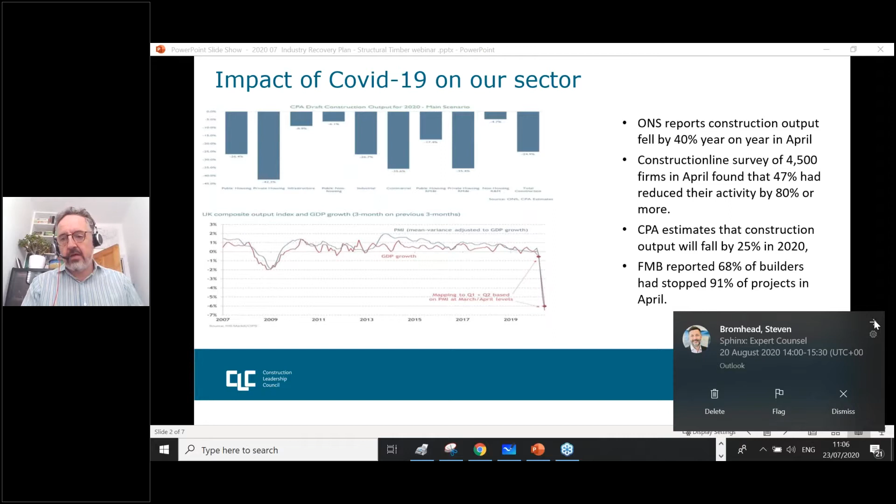And then this idea of accelerating the adjustment to a new normal, and a new normal has to be a more productive and more sustainable new normal. So then you can start to see the clues around direction towards net zero, direction towards wider utilization of offsite prefabrication, for example. 3 phases, I'll come back a little bit later on.

Say, for example, the CIH value framework, which is a 5 capitals tool, which will get people to think more about, say, for example, natural capital, more about human capital and innovation. So some really good complementary elements there.

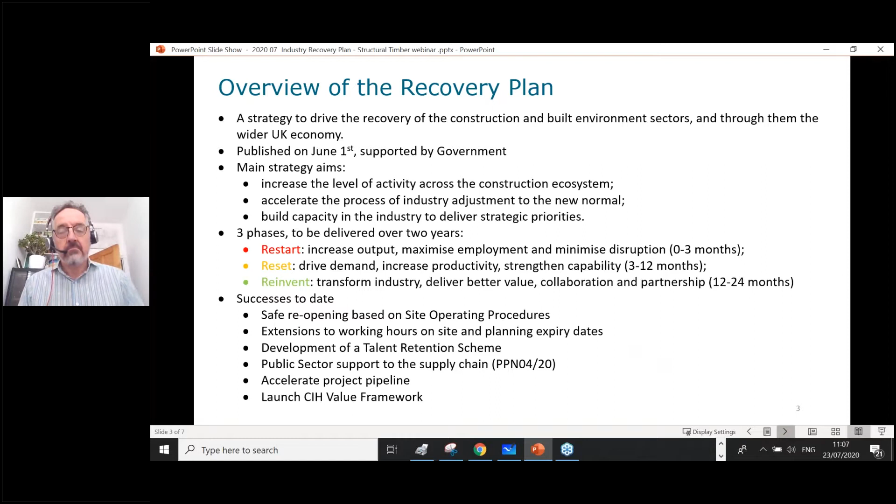And now getting into the real meat of this. This is a 3-stage plan, each with 3 key areas of priority. And if you go and download the full plan, you'll see that there's another page for each of these stages. So I don't intend to go through in much detail. There is a lot to it, and I'd recommend that everybody goes and digs it out. Easy to find on the Construction Leadership Council website.

You'll see that Restart is focused on trying to get as much of the existing work going on as possible. And if you think about something like the recent announcements around retrofit funding, fast money to get as many people working on site as possible. And once you've got that set up, that's a project, that scheme up and running. So very important that you get that money flowing through quickly.

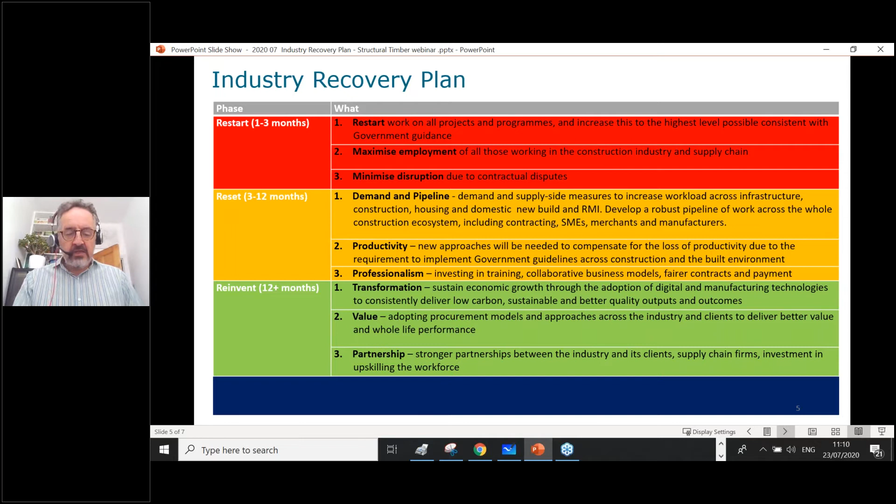Then the work around Procuring for Value, which was launched last week on the 2nd anniversary of the sector deal. So again, some great work there. And then this idea of partnerships. If you can imagine, really strong partnerships between manufacturers, standards organizations, clients, designers, to start coming up with these great solutions. Now, just then getting that into something concrete, what are we going to get out of this?

Reducing carbon emissions perfectly aligns with the timber agenda. And then some of these societal needs, I think, would also include introducing more manufacturing capacity in local areas, so resilient industry. And on the construction side, the elements I'll probably highlight here are the ones around the innovation culture aligned to productivity, and the skills and industry diversity bit. And that's people, and it's also players as well. And just wrapping up in terms of what does that mean for the timber sector, I've obviously not put a no in there, but I put some maybes.

And so you'll see there's a very strong alignment to net zero carbon, as you'd expect. And of course, that's something which will have to be detailed out over a period of time. More strongly, there's a really massive push towards component-based design. So again, if somebody wanted to have a look on the website around platform-based design principles and think about how timber components might fit into that, that's a huge opportunity.

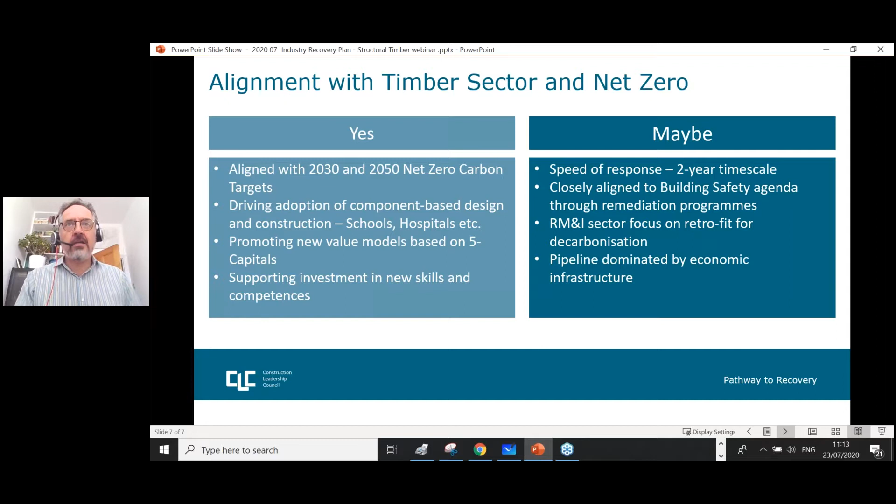Great, thanks very much, Simon, for your presentation. And before we move on, I've just got one quick question for you. So the CLC came up with the recovery plan a little while ago now. So how do you think the industry is actually doing right now in terms of recovery when it comes to meeting the recovery plan?

Well, I think as I had on that opening slide, there's been quite a lot of quite good positive uptake in terms of the kind of steps that were needed to help the industry. And a good example of that would be the announcement this week around provisions for local authorities to provide greater flexibility around operating hours. And it appears that quite a lot of organisations have been quite successful in getting their productivity not up to levels where they were in February, March, but as close as you possibly can. So I think people are in that kind of space.

At the same time, I think we do have to be realistic about just potentially how much harm was done around the shock in April and June in terms of just how much cash was lost. So I think that's something which we just need to watch out for in terms of the health of the supply chain and see how they're coming back. But considering how badly the sector was affected, we're not doing badly. But at the same time, I wouldn't want to be too optimistic about saying we're out of the woods yet.

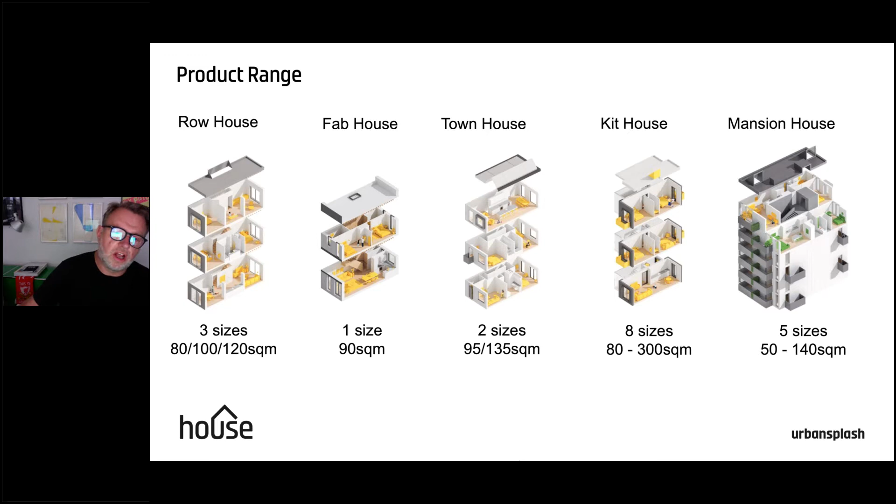Where we are at the moment is we've got an emerging product range, and that's just some of the stuff you can see on the screen there now. There's a few key things which all of the products share in common, and that is we want our homes to be bigger generally, because the UK's got the smallest homes in Europe, and actually they've been getting smaller over the last 20 years.

We want more flexible homes because the house building industry doesn't really give a lot of choice here, so we want to give customers the ability to configure their own homes and create homes they want to live in for themselves. And we want our homes to be naturally as sustainable as they possibly can be, and that's a journey we're on. We haven't got it right yet, I wouldn't say, but we're definitely ambitious in our plans for that, and certainly with Sekisui House, keen to push that as hard as we can.

And getting modern, well-designed homes, which I think is missing in the market, is really key to us. And the big thing there is factory standards, and that's about providing not just quality, but speed, lower waste, less energy, and less noise and disruption on site. I think all those things are key to this conversation.

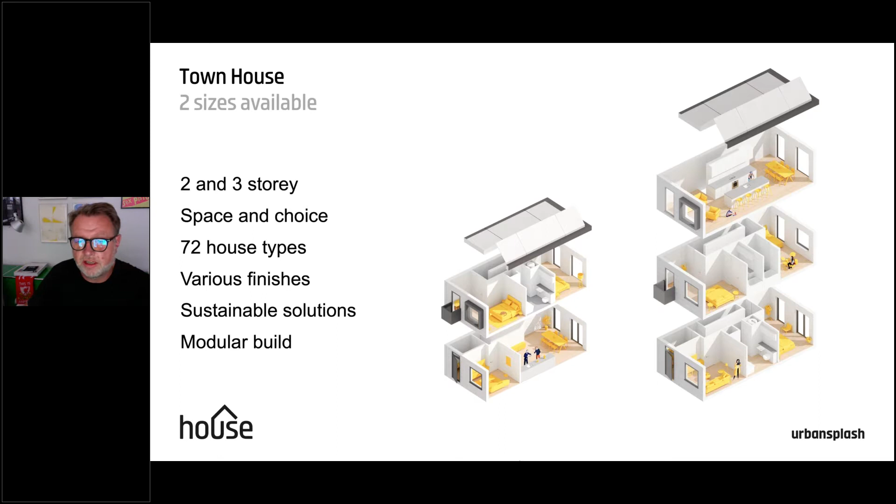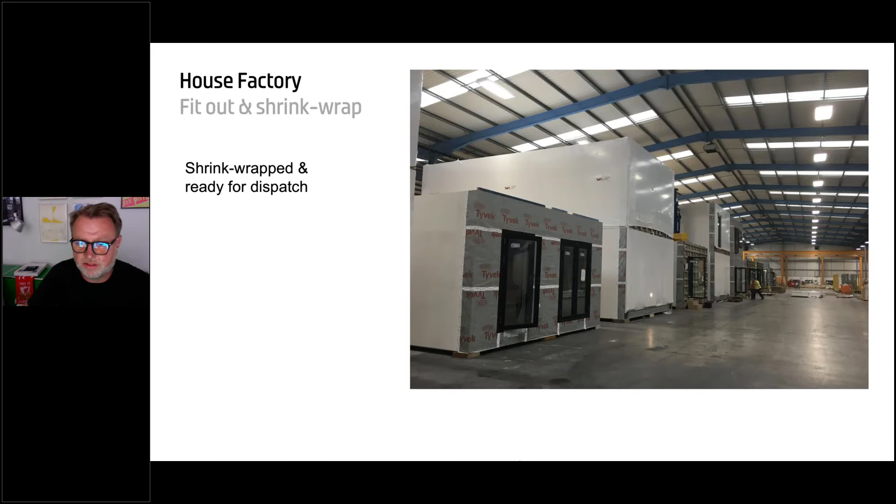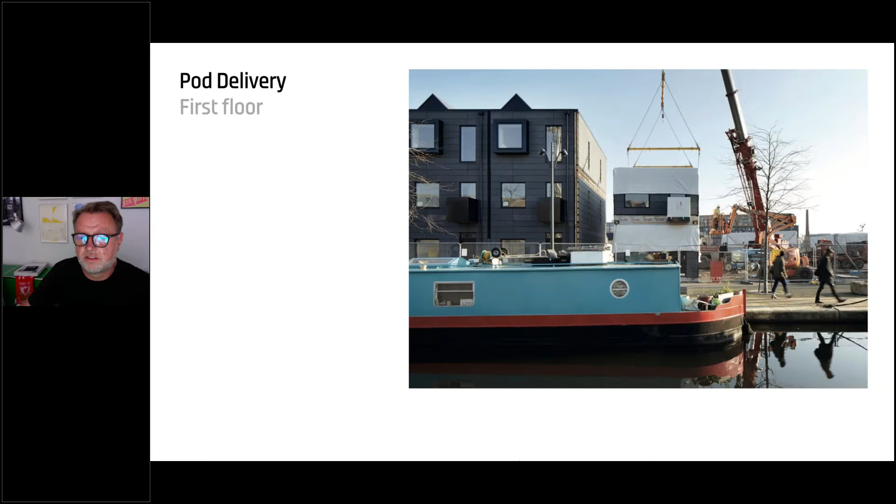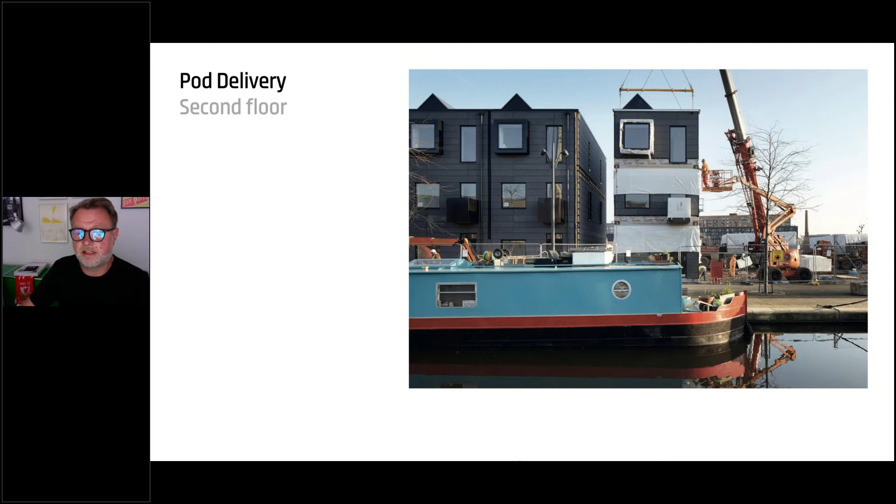We then completely fit them out, so they're completely finished internally. We shrink wrap them and deliver them to site. So that's one being delivered there. And then ground floor going in, first floor going in, second floor going in, and we can typically do about three 3-story houses a day with these modules, providing the site's ready to take them. So it's really fast and efficient.

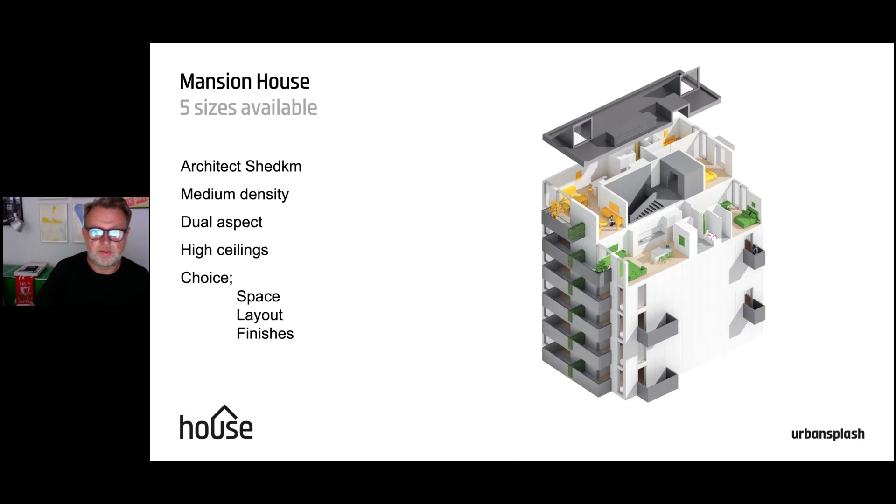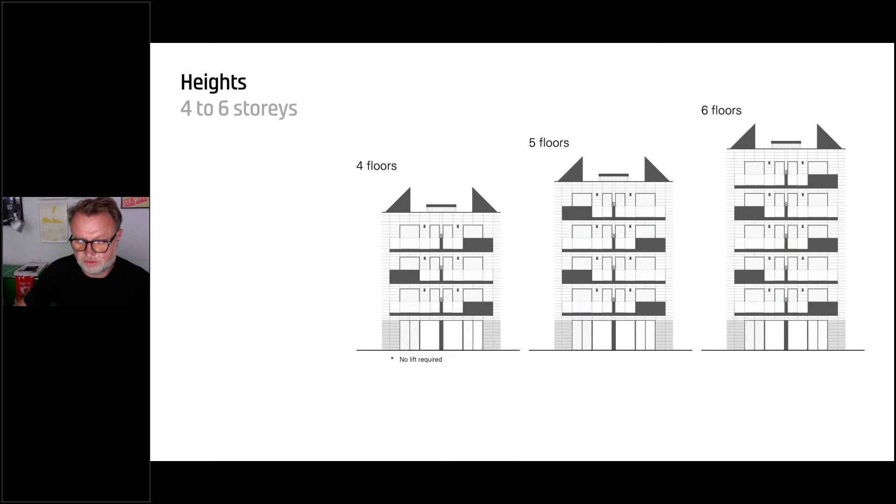But I wanted to particularly talk to you about Mansion House, which is a product we've been working on for a couple of years. It's a mid-rise apartment building. So I'm just going to move on. And the idea is this will be a key part of our range. We'll be able to do it on lots of our sites. So typically it's 4 floors, 5 floors, or 6 floors. We can arrange them in terraces, crescents, and squares.

So it's quite flexible. And then the floor plans are quite key here, because one of the things we're keen to do is make sure all our homes are dual aspect. They've got high ceilings, really good light. So this is a dual aspect plan arrangement, and for apartments, you don't see very much of this around actually. So it's 2 apartments nested around a core.

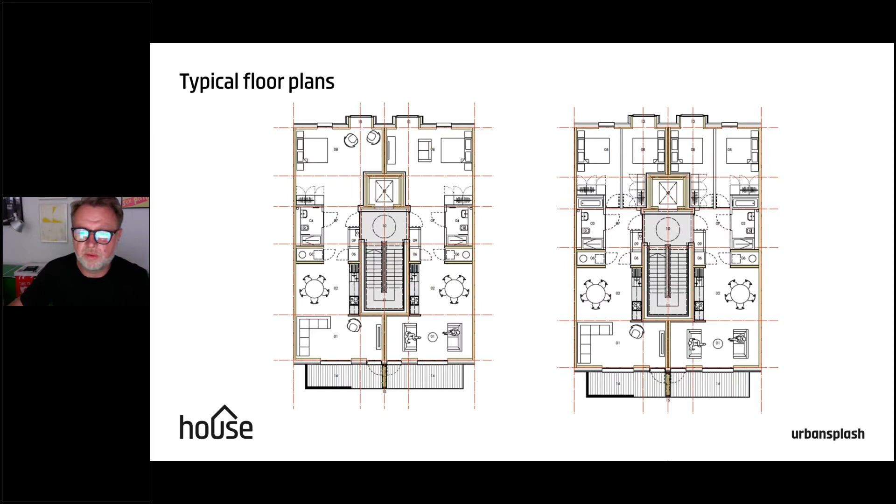So you do get cross ventilation, you get great views, and you also get lots of natural light. Importantly, like our townhouse product and all our products, our customers get to choose the fit out. So on these plans, you might be able to detect there's some variance, but you can effectively get a 2-bed, 2-bath kind of conventional arrangement into the space. But you can also have an open plan kind of loft apartment if you want, and other choices in between. There's 9 different choices.

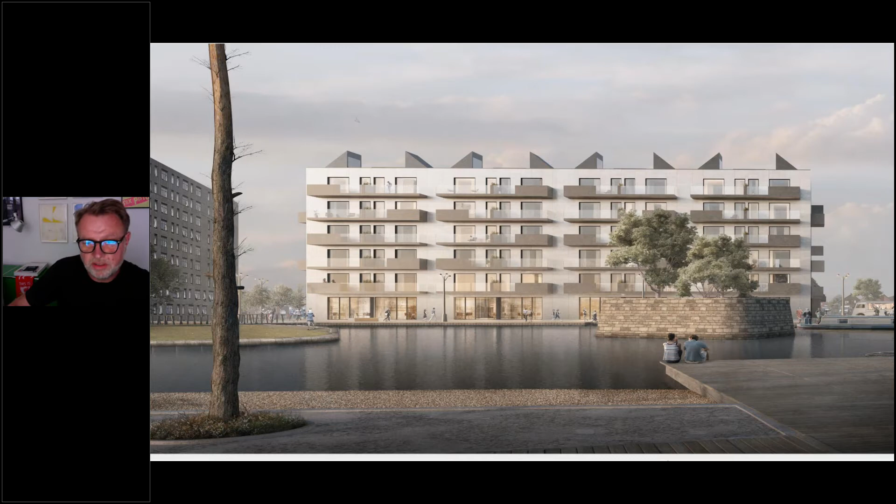We've got planning for quite a lot of this over the UK. This is the one in Manchester, which we are building at the moment. Now, interestingly, we couldn't build that in our factory because it didn't really suit volumetric. So we really had to explore, well, what other approaches could we take? And we looked at everything actually.

And we're particularly drawn to this kind of diagram really, that there's been a lot of focus on operational carbon in the house building industry, and that's very relevant to customers. So that's about how much energy they may or may not use. But actually, there's this whole thing about the embodied carbon, the whole life carbon, and we're keen to do what we can to tackle the embodied carbon side of our business.

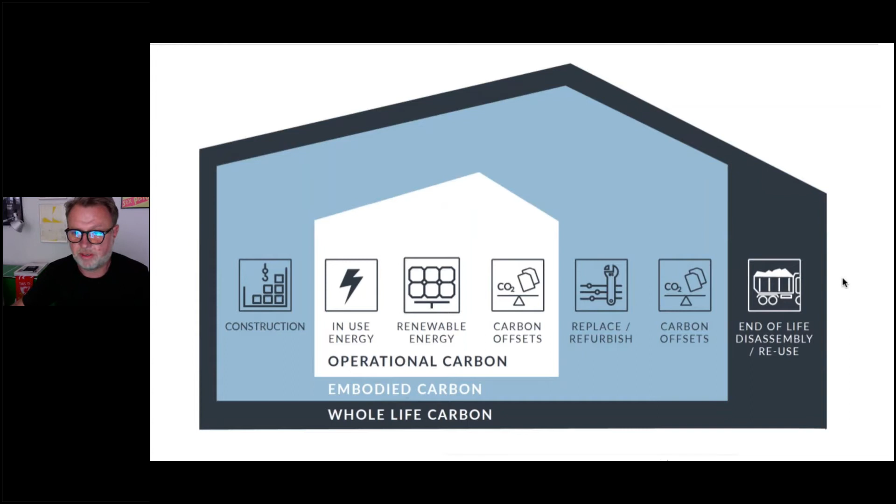So as part of our explorations, we became very interested in engineered mass timber, and in particular, cross-laminated timber. It's a relatively new technology in relation to more established technologies, but it does really open up some amazing opportunities for the industry. I think people might be familiar with diagrams like this, but there's a virtuous circle here with using timber, renewable timber, and that's part of the story.

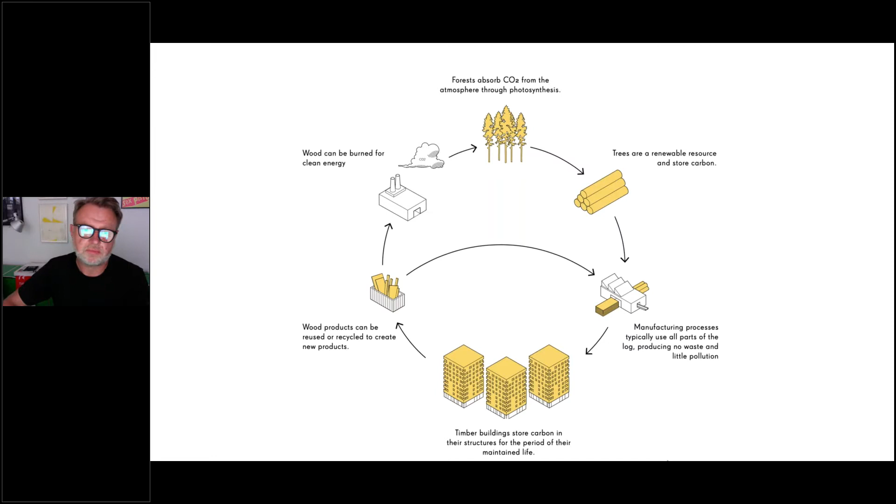But for us, if we're not going to go volumetrically, we want to go MMC and component based, and keep it as simple as possible so that we can build quickly, efficiently, and to very high standards. So cross-laminated timber is fantastic. It turns up, and we can just kind of put it together very, very quickly. We can then put components inside the home and fit it out, and external components as well. So the idea with this is all the components are manufactured and just assembled on site.

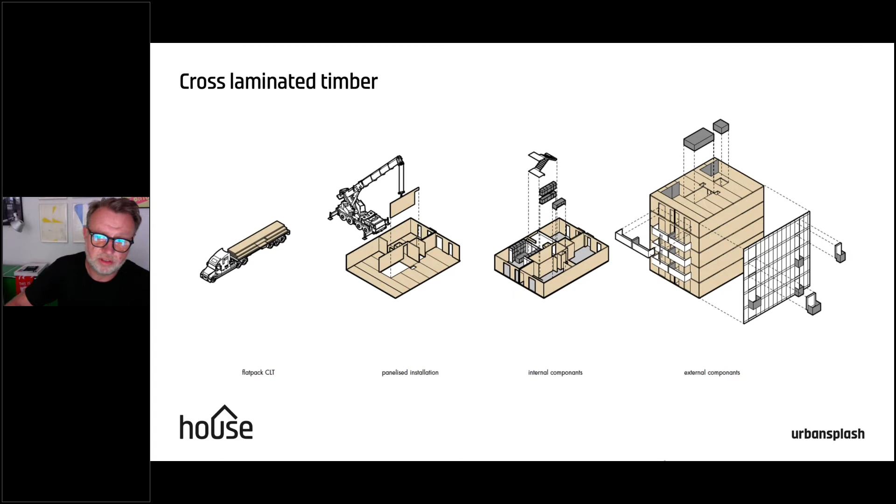This is actually the live site in Manchester. So it's all precision engineered. It comes to site pre-cut and just craned into position straight off the back of a lorry. The entire structure for this building was delivered on 38 lorries. So that's less than one lorry per apartment, so very few traffic movements to site.

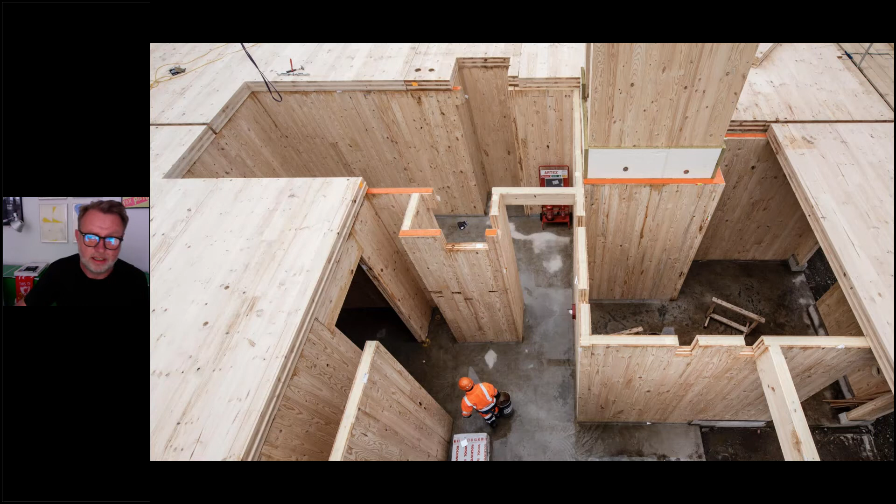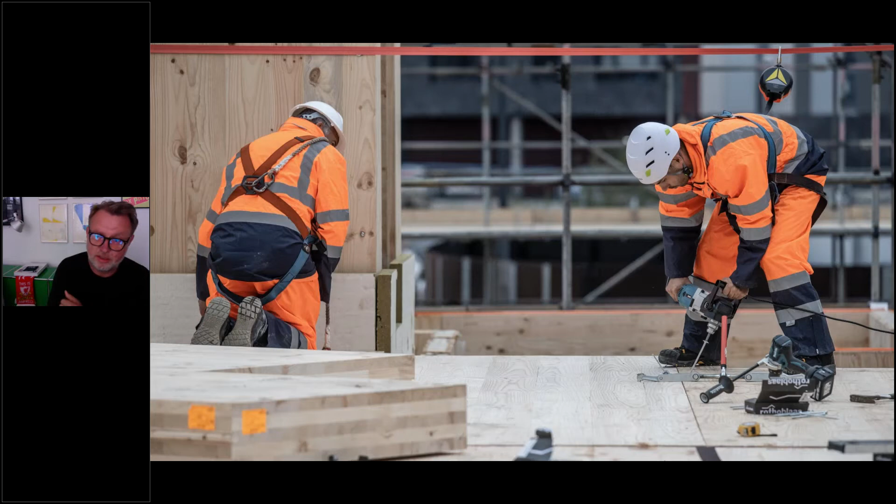This is a view down, but effectively what's great about CLT is it can do all your primary structure, walls, floors, and roofs. And for us, it's great because one subcontractor can effectively do the structural shell of the building in one go. So we're not crossing trades. Interestingly, really simple to erect on this building, 1 crane operator, 6 operatives, and only small power tools to erect. So it's actually quite quiet on site as well. So it's really good in built-up areas for neighbours and what have you.

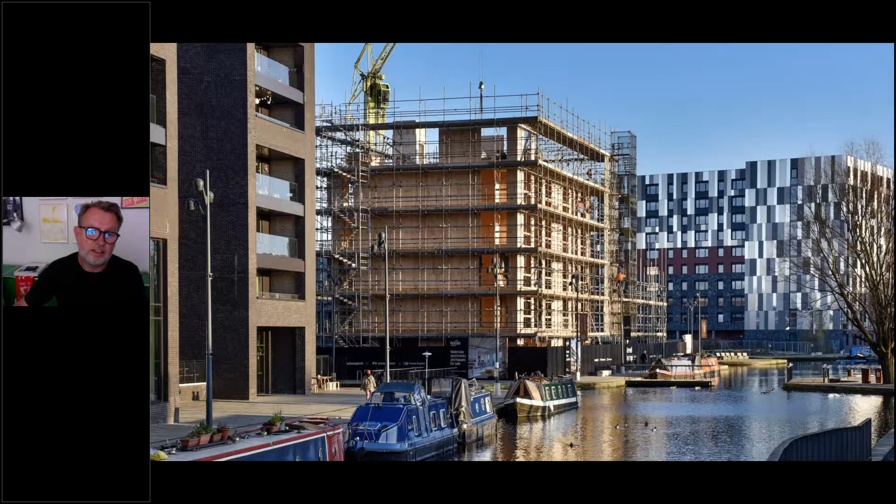Zero waste. This isn't from our site, but actually there's no waste on this because we're not cutting anything up or doing anything. We're just assembling. So no skips required in this phase of the work. So really great. And this is it probably a couple of months ago now, but it took 12 weeks to install the whole structure here.

And interestingly, on the carbon side of it, through some kind of industry calculator, which our supplier has helped us with, it's 1,130 tons of sequestered CO2 in this building. So that's great, and it gets us off to a really, really good start, and that's much, much better than could be achieved with other more traditional technologies.

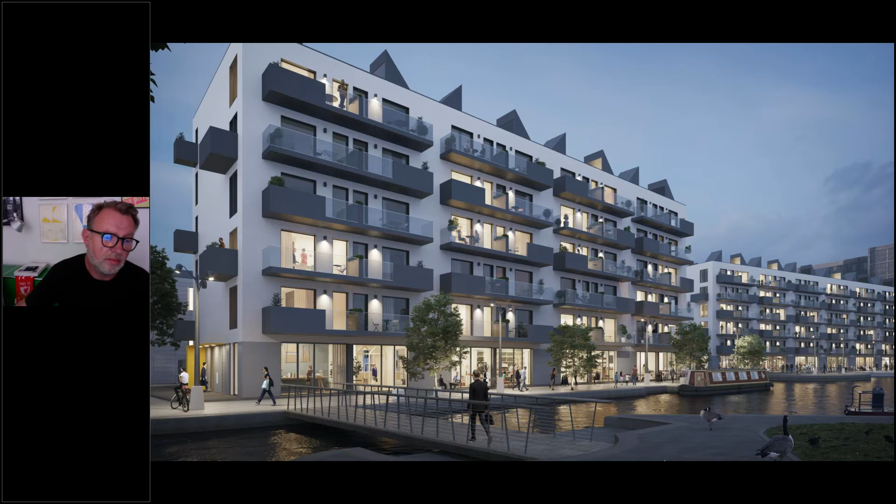However, we've still got to finish the building, so that's not the end of the story on the carbon footprint side of it. So we've clearly got to deal with all the exterior components, but we're trying to keep them as simple as possible. And like with the CLT, it's an assembly thing on site, not a making thing on site. And internally, it's the same thing as well.

But I think one of the things that really excites us about CLT is that it's a material that can do so many different things. It can deal with structure, we can deal with fire, we can deal with sound, we can deal with compartmentation and party walls. But it also looks really great, and it actually isn't used much in this way in the UK. It is in private houses and stuff like that, but not many people expose it.

And what's great about exposing it is we can minimise finishes, so there's less materials going into the building at the end, and that saves on time, saves on money, and saves on carbon footprint. And we think it looks really great, and customers will really, really love it. So these are just some images of it.

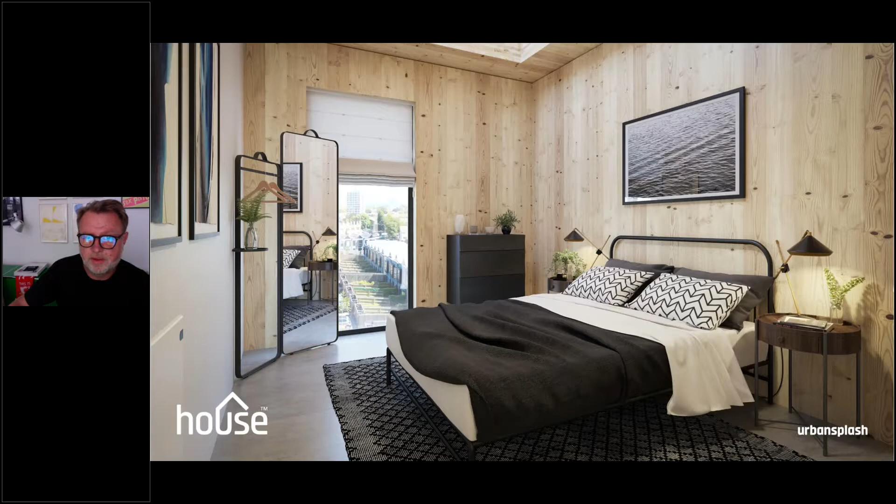Ceilings are 2.8 meters high. So this will be finished later this year. So I'm going to conclude now, really.

As a business, we're on a journey with this. We certainly don't have all the answers. We're very excited about what we can do with some of this technology. We do believe that mass engineered timber is exciting, and we can deliver great buildings with it. It could really help the industry achieve some of its carbon reduction targets. And we as a business are very, very committed to exploring this further and introducing it to a wider product range.

And this, for example, is our current sales suite design, which we'll put on all our sites. This happens to be in Cambridge, and here's one being built now. We think it's great because it demonstrates what you can do with CLT. I think it'll be great for engaging and inspiring our customers and bringing them on the journey with us.

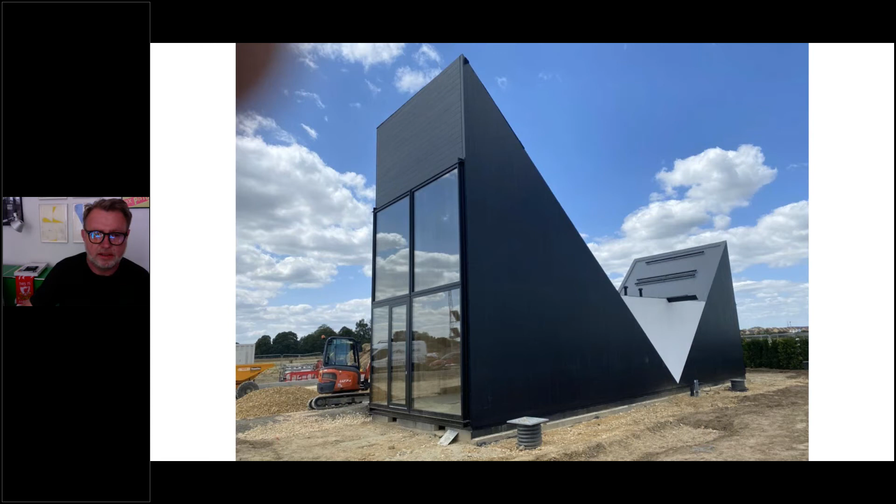But I think that is me. I hope I've stayed within the 10 minutes. Thank you. That's great. Thanks very much, Jonathan, for your presentation.

It's really interesting. I was thinking about your relationship with Sekisui House, which, I've seen the videos, has an amazingly automated production process using robots, a bit like a car factory. Thinking about the potential of timber, how does timber lend itself as a material that you would process in a factory to a very highly automated production system? And this is something you're exploring.

Yeah, certainly with the CLT, that is fully automated. If you've been to CLT plants, you'll see how they do that. In our factory, we're on a journey with this. We're still building fairly conventionally. You could argue we're building pretty much like we'd build it on site, just in dry conditions. But the tech is out there to mechanize all of that. It's a matter of capital investment, and the right time to make that would be my take on it. We're not there yet with it.

Great. Well, thanks very much. So I'm now going to hand over to Silvia, who's going to talk about the timber in France. Okay, can you see the presentation or not yet? Yes, we can. You just need to maximize your screen. Yeah, just 1 second. Sorry for that.

Okay, so thank you very much for this invitation. Silvia Melegari, I am the Secretary General of the European Organization of the Sawmill Industry. My presentation is a little bit broader than just talking about what is happening in France. We are going to start with some numbers that are essential, because when we are talking about wood promotion, we cannot disregard the wood availability. So let's look at some numbers.

According to the Global Forest Resource Assessment presented in 2020 by FAO, the total world forest area is 4.06 billion hectares, which means 31% of the total land area. While Africa had the largest annual rate of net forest loss in 2010-2020, Asia, followed by Oceania and Europe, had the highest net gain of forest area in the same time frame. Globally, only 30% of all forest is used primarily for production of wood and non-wood forest products. That means that only 1/4 of the harvested forest is actually used for solid wood application. So we still have, from a forestry point of view, a potential in wood availability that can be explored.

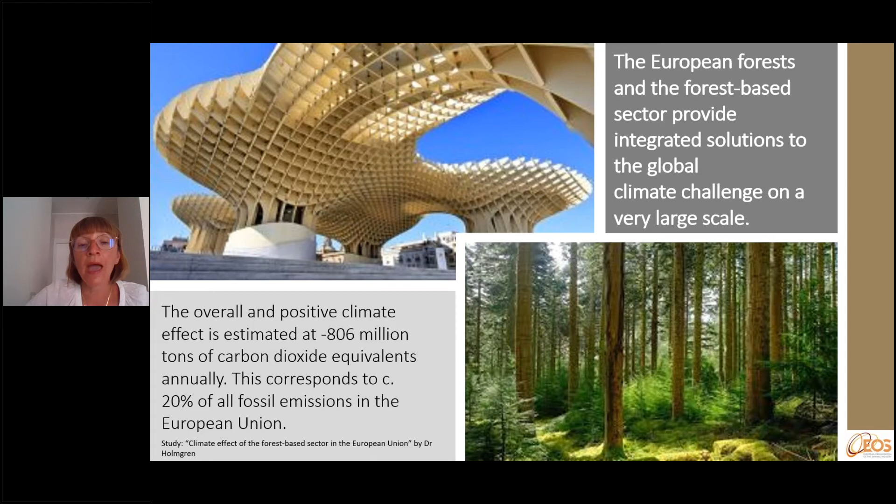So there is no doubt that harvested wood products have a key role in decarbonizing overall the economy and the building sector. So as I mentioned before, it's not only France that is promoting the use of wood in construction. If we look at the national accounting plans produced by member states under the LULUCF regulation, just to mention three countries, Austria, Finland, France, have all recognized that timber in construction plays a key role.

The role of promoting wood in construction has been recognized in the strategy of Finland for a climate-friendly economy as long-term carbon storage. France is presenting a national low-carbon strategy that emphasizes maximizing the substitution effect of the storage of carbon in wood products, particularly through an intensified use of wood in construction, which is key for the country.

It should be recalled that regulating construction work belongs to the competence of member states, and the EU legal framework for marketing construction products is based on the principle of technological neutrality, meaning we cannot have at European level a legislation that emphasizes or recognizes explicitly that wood should be used more compared to other materials.

It should be noted that the EU and the WTO rules are material neutral. Wood per se may not be promoted, but may be encouraged indirectly on a competitive performance basis, which applies to all alike products, meaning through standard recognition of the benefits of using wood.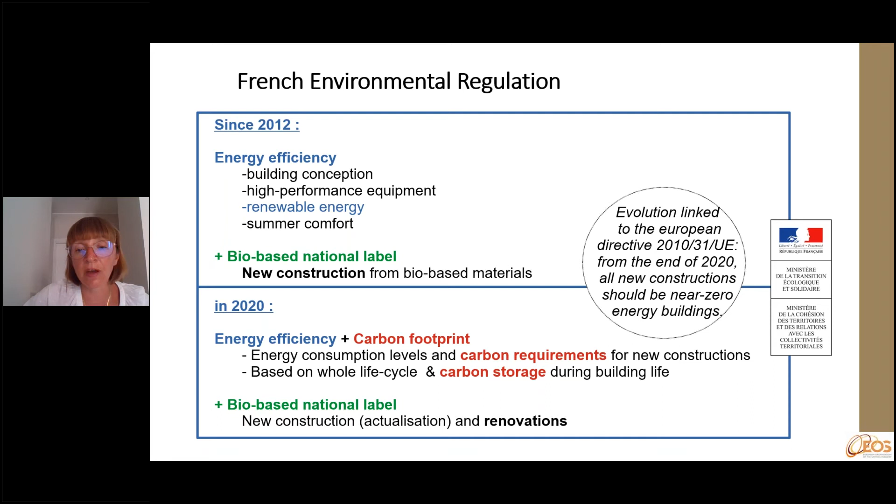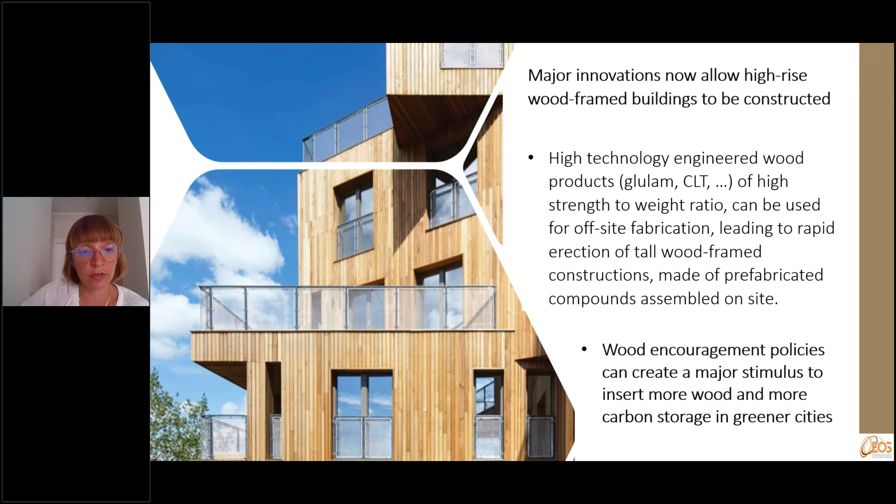Moreover, France is also going to produce a bio-based national label that will be applied to new construction and also for renovation. So all these elements are of key importance, and they will be a key element for using more wood in construction. We have seen it, and it was mentioned before, so there is no reason to spend more time on this. We have fantastic new applications, glulam, CLT, prefabricated wood solutions that can be used in building and can be disseminated as a tool for using more wood in construction.

FAO has also published a new kind of collection of best practice by member states in the framework of the COVID crisis, in order to collect all of the new policies that are already in place in several countries like Sweden, but also New Zealand and Germany, and that are a tool for using wood in construction. If we look at the Swedish municipality of Vaxjo, there is a building strategy with wood since 2005. And already by 2020, it was expecting that all new buildings would have been built out of wood. This strategy is also important because it includes a collaboration between industry and the university.

Then we have New Zealand, who has advocated for wood use from a local forest industry. The region of Freiburg in Germany has a dedicated policy to wood use in the private sector, but at the same time, they've linked this policy to locally sourced and certified wood. But we have also other examples, like in Australia, where we have the Make It Wood campaign, or in British Columbia, where since 2009, there is the Wood First Act implemented in order really to boost the consumption of wood.